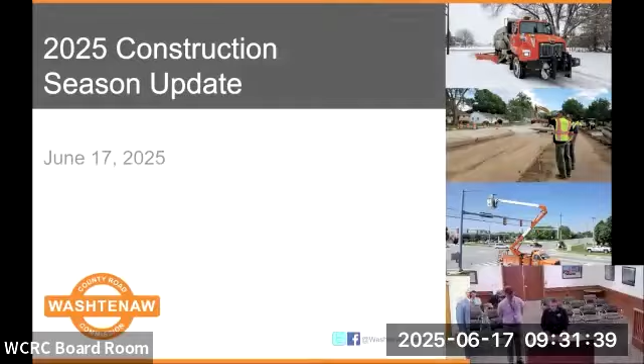Brent Schlack, Director of Engineering, presenting the 2025 construction season update. We'll go through the agenda.

Following a suggestion from Matt, this presentation follows our budget format. So we have our road resurfacing projects, bridges and culverts, traffic and safety, and non-motorized, following that format within our budget documents.

We'll go through all of those, then have Adam come up to talk about the operations department, road maintenance, and some of his projects. Then we'll get back into scheduling and challenges, followed by a Q&A.

These are the three presenters: Adam, Director of Operations; myself, the Director of Engineering; and Aaron Burkholz, our Assistant Director.

This is the overall map of our projects for this year. It's kind of hard to see here, but it's accessible through our interactive website on the road construction page, where you can click on any of these projects to get more information. We'll break this down in more detail as we get into each topic of the agenda.

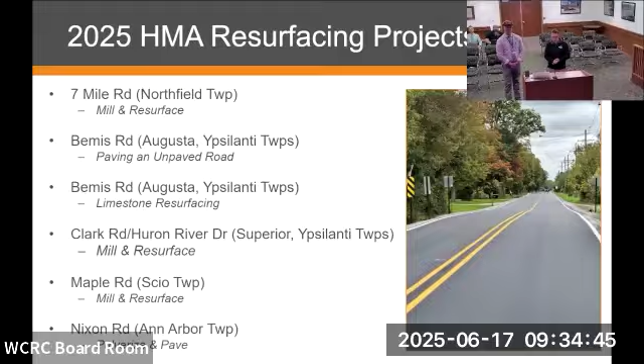We'll get into specifics of our projects. Not every project is listed here, but these are some highlights. 7 Mile Road, up in Northfield Township, is complete—that was a mill and resurface project, part of our millage plan.

We have a couple projects on Bemis Road: one is our limestone segment, and I don't know the status of that one—want to come up, Adam? We're also paving the unpaved portion between Stony Creek and Hitchingham.

Good morning again, this is Adam Lape, Director of Operations. The Bemis Road limestone segment is actually mostly complete. We have a few touch-up drainage items, but the limestone has been spread—about 11,500 tons that Ken and Jared had the crew spread. We spent quite a bit of time prepping it this spring, so we're doing pretty good in that area. The limits are Whitaker Road to Rawsonville.

The limestone resurface extends to Rawsonville to the east.

Then we have Clark Road and Huron River Drive near St. Joe. The road name changes kind of mid-block because St. Joe rerouted where Huron River Drive used to come through, so it's a combination of Clark and Huron River Drive within Superior and Ypsilanti Township. Maple Road, over by Skyline High School, is another project.

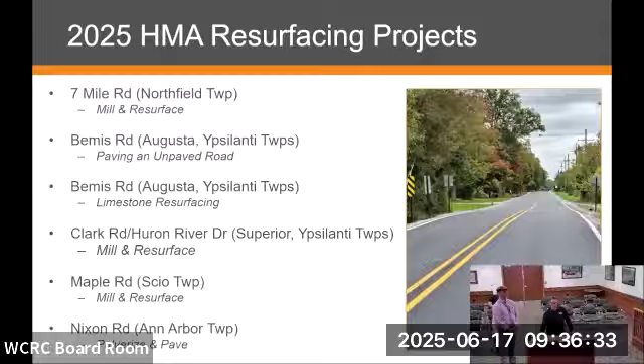Then we have Nixon Road, which is a federal aid project. We're going to pulverize and pave. This is north of the city of Ann Arbor, from M14 to Pontiac Trail.

Dexter Pinckney Road, this is actually a two-part project. We have millage funds, and then we have federal aid funds that we're going to be doing on two different segments. Basically it's from North Territorial to the county line, the complete project with different funding sources.

McCollum Road, again, Adam can give an update on it, it's a limestone resurfacing project. Later in the program we'll go through what that looks like in his presentation.

Yeah, so McCollum, we got a little bit of work done there, similar to Bemis, limestone getting spread out there and a few drainage items to seal up the project and call it good. But we're moving pretty good through there. That's been kind of helpful this year.

And then I'll skip one real quick and go to Walsh Road because I want to highlight that one, it's a combination of township partner, millage, and road commission local road program. So there's three groups and three funds helping us out on that. It's been kind of a fun project.

So we spoke with the township last fall, and the previous supervisor wanted to try to stretch some millage dollars. Talking about Webster. Previous supervisor there, John, wanted to stretch the millage a little bit.

So we worked with a couple of his group, and then that administration changed, and same concept, they wanted to utilize some of the funding on Walsh Road. So we met as a group, came to that agreement. And then also this spring, their new road millage that was passed last fall is also helping us partner within our local road program to spread that stone.

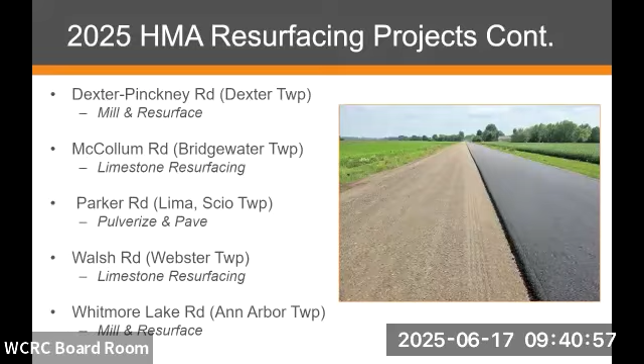Questions at this point? Commissioner asks: you're going to be widening State Road from where to where? From Campus Parkway to Old State. It's currently a mix of 3 to 4 lanes with some auxiliary lanes, and it'll go to a 5-lane section.

I have a question. It seems to me we're not getting calls about chips and stones sticking to people's nice clean cars. Have we changed what we're doing with chip seals? No, cyclists used to call angry that they're sliding all over the place, but new machinery has helped us a little, though we really haven't changed the process.

Aaron talks about it a lot in our preseason meetings and construction project meetings, about the aggression and speed that people travel. In all honesty, they're blowing any excess chips off the road, with minimal sweeping compared to what it used to be. We still get windshield complaints because people feel aggrieved about chips on the windshield, but unfortunately people aren't adhering to the recommended 35 mile an hour we set.

I thought maybe we were rolling it differently now. No, just using our new machinery a little bit better. Ken and Jared worked with the group, we have 2 new rollers, which helps some, but in all honesty it's the same process, same rates, with our new spreaders - the actual aggregate spreader, which we'll show a few pictures of here in a little bit.

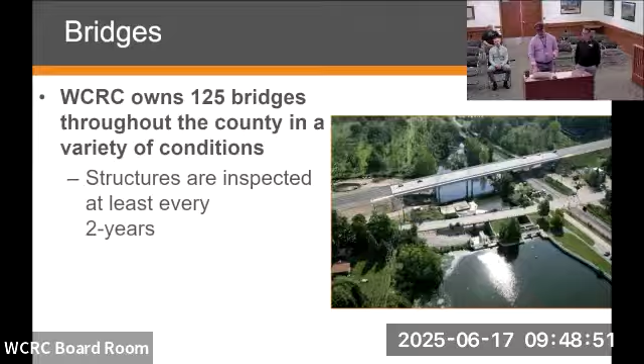If a bridge falls into disrepair, becomes structurally questionable, or gets a weight posting on it, we have to inspect it more frequently. Reflecting back on the Foster Bridge, that one is inspected every year because it has a 20-ton weight limit. The same holds true with the East Delhi Bridge, which also has a 20-ton weight limit. Bridges with weight limits generally are inspected every year, and if the weight limit gets too severe, you inspect them every 6 months.

There's a great effort put forth by the Road Commission and our engineering consultant, who's worked with us for many years, to conduct those inspections. We have to report those inspections to MDOT, who in turn refers those to Federal Highway, so all parties are kept informed on the bridges.

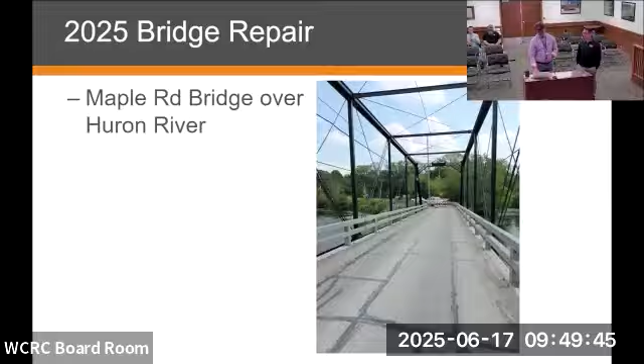And here's a picture of the Maple Road Bridge. Again, earlier in the meeting we went through that extensively — we talked about the condition, why it's closed, and the potential repairs that may be needed at some point in the future. Anything that would have a span less than 20 feet would be a culvert.

Some culverts we refer to have a bridge-type structure, but if they're under a 20-foot span, they all go into the category of culverts. We own about 2,800 culverts throughout the county, of various sizes, various materials, various conditions.

We've inspected the larger structures at least every 4 years. From earlier in my career to now, credit to all those here at the Road Commission who have worked on that, and the budget approved by the board to undertake that rigorous inspection of these culverts. I'll admit that early in my career, it was basically that we would respond to a culvert when there was an issue, when there was a hole in the road, or heaven forbid, when a culvert collapsed.

We would address it at that time. It was more reactive. We're trying now to be more proactive, where we're inspecting these.

We basically go down to about a size of a 5-foot span structure, and that's our target. Anything with a 5-foot span or greater, up to just less than 20 feet, we're out there inspecting every 4 years. That's not to say we don't sometimes discover culverts we weren't aware of.

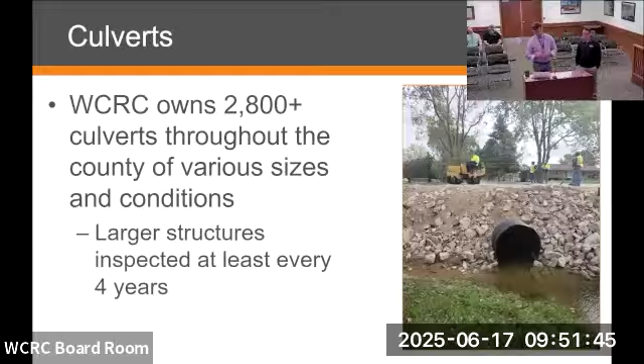Just to put it in perspective: 125 bridges, and the culverts ranging from 5 foot to 20 foot, there's 342 culverts. Those are all on the inspection cycle, and if they're in poor condition, we look at them more frequently, much like the bridges.

Commissioner Green. Thank you. So the Foster Road Bridge is actually owned by the Road Commission, correct? We own it. It belongs to us.

So I thought I heard something about the township residents not wanting a new bridge. Who makes that decision, us or them? At the time, the Road Commission Board made that decision to not pursue the replacement of that bridge. So ultimately, this Road Commission has the authority to decide things like that.

For the Maple Road, Foster Bridge, there was a great deal of call by the community to retain the old historic bridge and not build a new one. Looking back at probably between 2000 and 2002, the Road Commission Board at that time decided not to pursue construction of a new bridge and turned federal aid funding back to the state, because that bridge had been identified for a new bridge.

Now what they call that program, MDOT refers to it as the local bridge program. At the time it was called the critical bridge program. We had that bridge selected through a competitive grant for a new bridge to be built.

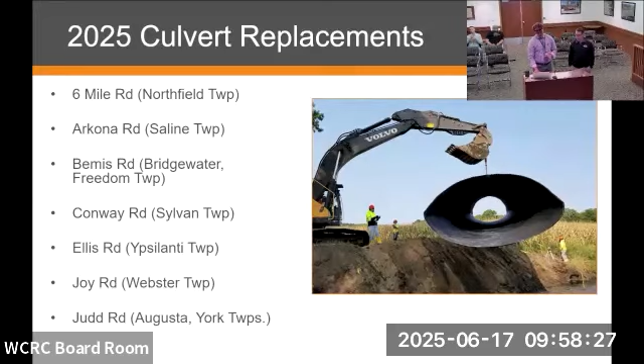I wanted to highlight those three in particular because they used a unique liner type system - Arkona Road, Conway Road in Sylvan Township, and Oak Valley Drive in Pittsfield Township. Those three culverts out of this list were actually lined, a new method we worked with a contractor on. Based on the challenges with standard removal and replacement, the lining allowed us to retain the existing structure but create a new structure within it. As those culverts deteriorate, the outside of the liner becomes the new culvert, and it's structurally capable of carrying full loads. It was really neat. I'd like to specifically mention Ken Harris, our superintendent of maintenance, who sought out that type of technology. Thank you, Ken.

It was really interesting to see that contractor perform that work. Cost wise, it's very similar to the cost for removal and replacement, and it's still a fairly new method, at least in the state of Michigan, for improving culvert crossings.

The one other I'll mention here is Warren Road in Ann Arbor Township, just west of Dixboro Road. The existing culvert there has a 20-ton weight limit and did receive stormwater grant funding. We partnered with Ann Arbor Township, and the advertisement for that replacement is going out today. It will be a sizable culvert - the existing one is roughly a 12.5 foot span, and the new culvert will be a 20-foot 1-inch span. That falls into a bridge category and will go on the federal list of bridges, so the total number of county bridges will go from 125 to 126.

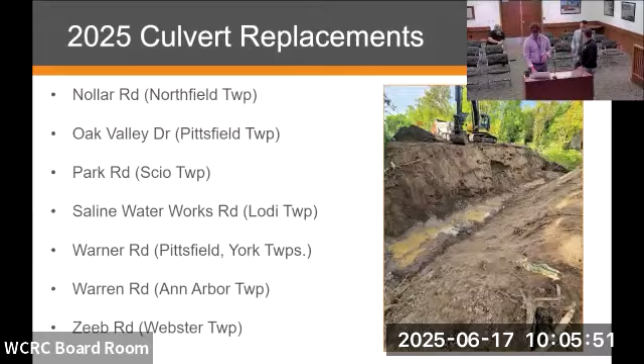Thank you for letting the supervisor in Ann Arbor Township know about all of this. Yep, of course.

Commissioner Green and then Commissioner Yamas? And it's also my understanding that there's no federal money for culvert replacement. Is that correct? That's correct.

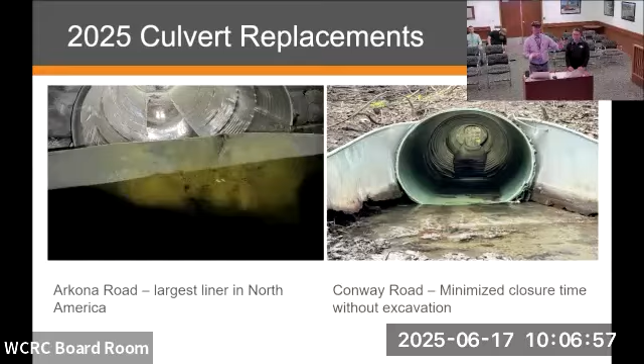The only money we could use for federal aid funds for a culvert replacement would be our urban funding or rural funding. You could target that general funding for a culvert replacement. We did that years ago, I think in 2019, when we replaced a culvert structure on Cavanaugh Lake Road, just west of the Chelsea city limits. That one we targeted STU funding, basically urban funding. The issue is that we can resurface a great deal of road with those funds, but replacing a culvert is a single point fix. So it's a difficult decision to forego resurfacing several miles of road to put all that money in one spot where there's a culvert. That's a rare thing. In my career, the only time I remember us using those funds to replace a culvert was in 2019 on Cavanaugh Lake Road. Beyond that, there is no federal aid funding available for culvert replacements, particularly on local county roads, since those are generally non-federal aid eligible, and the vast majority of our culvert needs are on those roads.

Commissioner Yamas: I have a question about the Conway Road picture, the minimized closure because of the lining, but what about what looks like wings coming out? They look deteriorated on the bottom. Does that not have to be repaired?

It doesn't really have to be repaired, but as part of our structure maintenance, we can go back with our crew and use a vendor for foam spraying. In theory we could stabilize that and foam spray it to prevent washing behind it. So there's some future work there that Ken and Jared will go back out and touch on areas like this. There are also other ways we could repair it, like excavating a little and popping that off to slide another one in, because if you look at the top right of the photo there's almost like a cable, which is the tensioning piece. You can loosen them, pull them off, forcefully push another one in, and tension it back around. Those are just considered spillway wings.

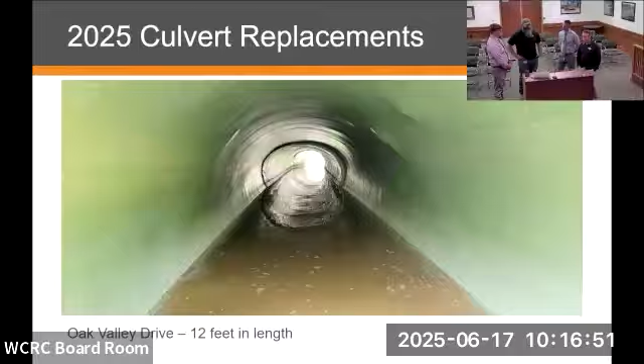There were individuals from New Jersey and Virginia out working on the process because of the complexity, especially the Arkona one, the size. Arkona was a transition liner, went from 72 inches to 76. So that was the little bit of the hiccup on that one.

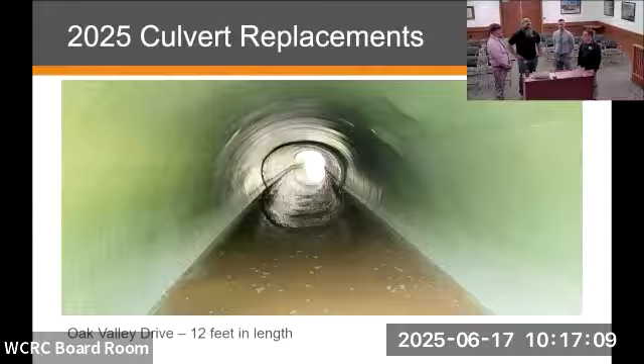That's why that 76-inch portion is the largest part in North America. Right now, they have capacity to do 84-inch. So we had to do a liner up to 84 inches, but the liner itself was about a 16,000-pound liner. They worked with Brewers and Manchester Towing to set the box in the hole, and then worked with the towing company to pull the liner through.

You got a movie of this, people? We got some videos, yeah. And then there's some information you'll see in the board packet as well, if you want to research the actual company that provides that.

We did a lunch and learn with them in the wintertime. Once the lunch and learn happened, we decided to move forward with getting some quotes, and the quotes were comparable to the prices we had to complete it ourselves. Within a week, they completed 3 liners.

It will remove the weight restrictions that we had on Conway. It will take it back to no restrictions needed.

And how did you find these people? We've worked with individuals like this, and at some of our CRAM conferences we come across vendors. So it's just a wealth of knowledge from those seminars and stuff. We've been able to reach out to them and took a chance.

So hopefully the science keeps going. We've nerded out for the morning, haven't we? See what you've done to us? Yeah, that science keeps going.

Hopefully that might help us on a Dixboro or something like that, talking about Warren Road and Dixboro. These are massive culverts, and renting a crane is much easier than digging a massive hole in Dixboro Road. Reality isn't there yet for us, but over time they seem motivated, and I think it's gonna catch on a little bit.

With having a sole source vendor for it right now, it helps us because we know we're only using the best that way. We're not trying to look between 2, 3, 4, 5, 6 contractors, not sure if this one's good or maybe not efficient in one spot and not good in the other. So right now, it's safe enough for us to use when we really need to keep a road open.

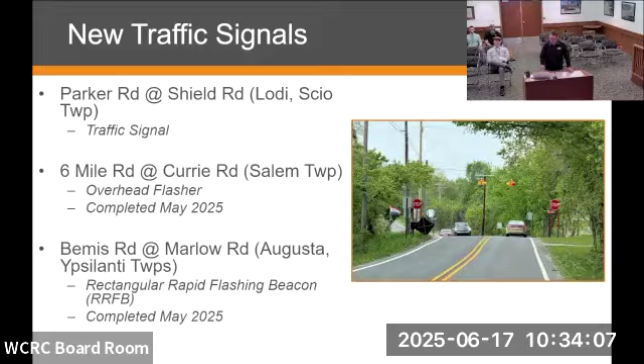We also have a large modernization project through our congestion mitigation air quality funds that we received. There's about 30 signals within Ann Arbor, Pittsfield, Superior, and Ypsilanti townships that will get modernized to include new equipment for our signal system, our advanced traffic management system.

So what will that include? It'll include updated cabinets, controllers, and vehicle detection at these intersections to help keep that equipment up to date and help us monitor different traffic patterns. So these become smarter? They do, a lot of these intersections already are smart where we can communicate with them, but it's just modernizing that equipment over time as it ages. The vehicle detection we use has batteries in it, and those batteries degrade over time, so it'll be a replacement of a lot of that equipment.

Keep in mind, these are out in the elements through winter and summer. Even though the cabinets are somewhat cooled, they degrade. Anything with electronic components does need replacing. The public generally won't notice a difference, so to speak, it's a lot of behind the scenes work. Ultimately, the traffic signals will look very much like they do now, but you'll see crews on the side of the road replacing those components Brent mentioned. So it's great to take advantage of these federal funds.

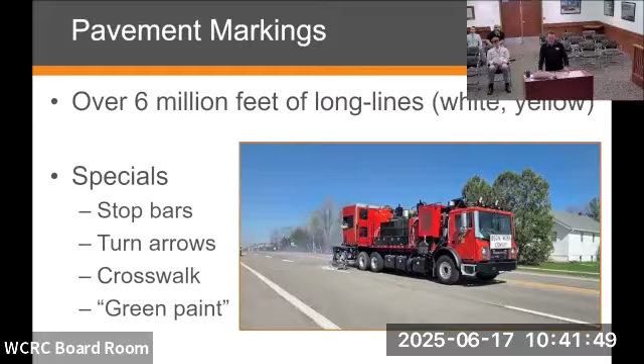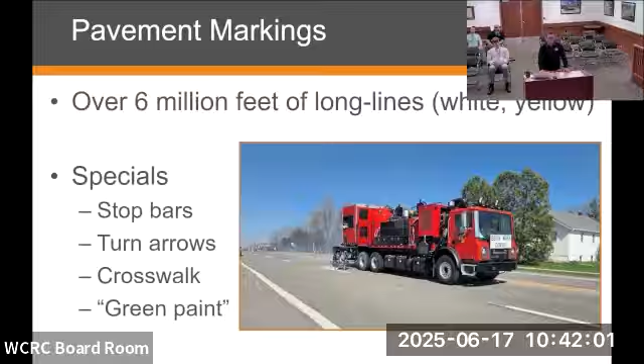Pavement markings, that's also kind of a construction project. Within that project budget, we'll be completing about 6 million feet of long line pavement marking, white and yellow, for our chip seal roads and some of our millage paved roads. We also have a retrace program, which includes special markings like stop bars, turn arrows, or railroad crossings. That's all included within that program, so that's the contract.

Truck. Oh, okay, that is not our truck. Gonna say, that's huge.

To note, this is the overall budget within traffic and safety. This does include some design component, but this includes pavement marking, guardrail, our traffic calming, our signal modernization projects, and some safety projects. We do have some safety projects where we're looking to put in center line rumbles, and these projects all include those.

Commissioner McCollum: Now the budget for this, like the traffic calming, isn't that part of township? That's part of the local agreement for the traffic calming, correct? So is that included in here? That's included here, yes, that would be on the local portion. Okay, local roads, 250, okay.

I'll turn it back, unless there's any other questions, over to Aaron, who'll go through our non-motorized projects. Any other questions for Brent on this? No? Okay, Aaron Burkholz, Assistant Director of Engineering.

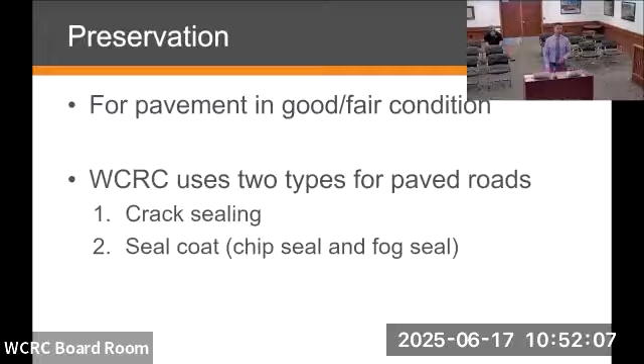You've probably seen this in some of our social media posts, some of our public outreach events. This is really one of the bases that we talk about. Here's that crack seal where we're just trying to get in there and fill that void that gets created. That's natural, it's going to occur. We'd love if roads didn't crack, but the flexibility and nature of flexible pavement means they do create some cracks eventually. So we try to protect that gravel base and the rest of the sub base underneath it from infiltration of water or other debris.

Commissioner McCollum: Not here in Washtenaw County, but when I'm in Wayne or other counties, there's like a crack that goes vertical down the road. Longitudinal, yeah. I don't understand that one. I can understand transverse cracking, side to side.

So what you're seeing is likely the seam or the joint, as a lot of us refer to it. That's why a lot of the projects now have void filling membranes and certain types of joints that we put down while paving, sometimes called a cold joint. That's where the paver only can reach out so far, and most of the time they pave these roads under some type of traffic, so to create the crown, that's basically the split. Consider it one pass of the paver and then another pass of the paver where those are butted up against that joint.

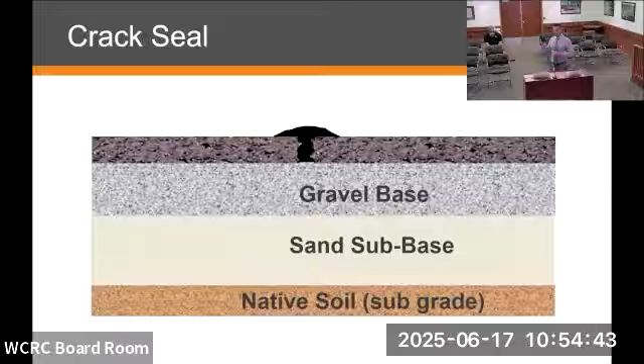Sometimes you don't see that on most of our roads because we get back and we're actually seal coating it first. We kind of skip the process because we refined that down and it's relatively affordable. So that's part of our routine process to seal that whole segment.

Most of our road network is two-lane county roads. When you get into Oakland or Wayne, some of the larger roadways with multi-lanes, you're going to have a crack at that cold joint where that lane line is. Typically, our crack is right where the center line is, so sometimes it gets covered up by paint, two yellow lines, so it may not be as noticeable. But definitely that longitudinal joint is there, and that's a real big reason why we do the seal coat program, it really helps to seal up those longitudinal joints.

We do have multi-lane roads like Plymouth Road and Carpenter Road. Ultimately, those joints did get wide, particularly on Carpenter Road, which we just resurfaced a few years ago. The segment between Michigan Avenue and Textile, those joints all opened up, and that was one of the reasons why we chose to do a resurfacing project to preserve that pavement.

Because one of the things you're doing is preventing water from coming in, and ultimately, if it goes untreated, you're going to have a pothole there. It'll start to degrade because the water gets into that crack, freezes and thaws, and ultimately creates voids, and a pothole will arise. We're trying to avoid that with all the work our crews do for preventive maintenance.